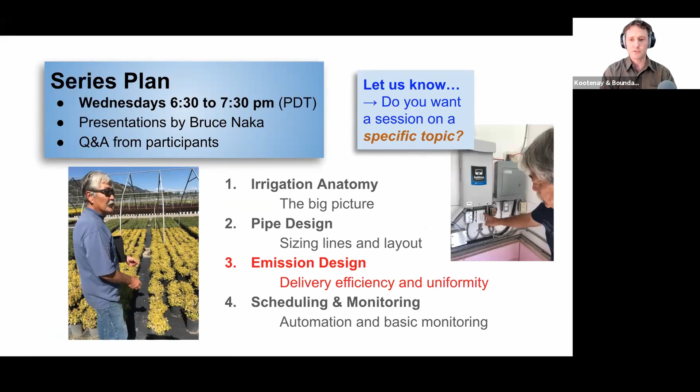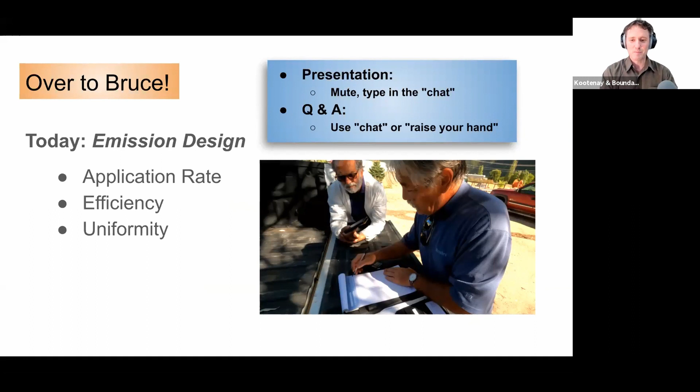What we're going to be looking at is application rate, how quickly you want to put water on your soil, depending on a number of factors, the efficiency of different systems, and then really crucially, how uniform you can get that water across your land, depending on the application. It's complicated as usual, but Bruce will do what we can to bring it down to earth for us. Thanks very much, Bruce. Good evening, everyone.

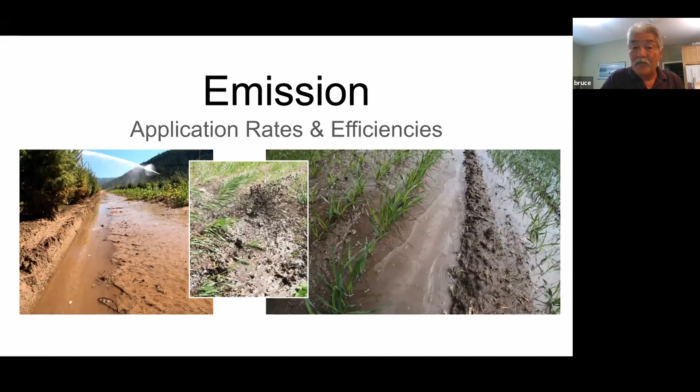So today we're talking about emissions. In today's presentation, we want to focus on specifics of how to apply water efficiently and factors which impact our ability to be efficient.

Some of the issues which have an impact on our ability to be efficient in our watering obviously is waste from runoff. Runoff is always an issue. If you're applying water at too heavy a rate, obviously you're going to have runoff. This session, we're going to be looking at what the right rate would be. Leaching means it's going to leach out of our root zone, so it's not effectively being utilized by our plants, so again it's a loss. In scheduling, some people are probably trying to make sure they have enough water, but a lot of times they're putting on so much water that the soil can't accept it, and it leaches away. Leaching causes issues with both of these problems we've discussed here.

I'm going to look at a little bit of a review here. The emission devices we are looking at include everything from drip irrigation type emitters to spray irrigation, and then more efficient types of sprinklers being utilized versus the brass impacts right now. In pivot systems, we're looking at the drop-down pivots, and then of course we have the big guns. So how do you select these things? Well, you're going to look at the crop height, the water demand for the crop, and the soils and terrain, and that's going to help you in your selection process of what type of device you want.

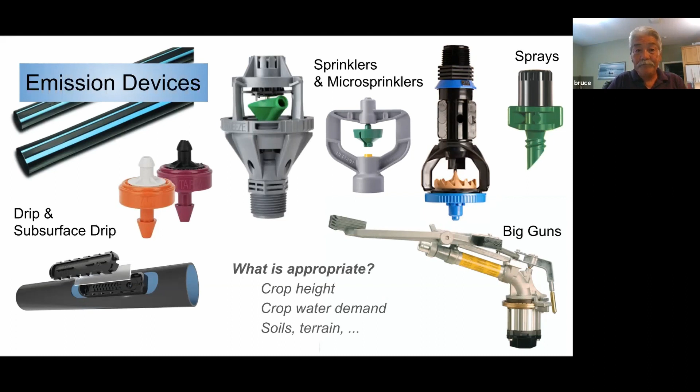Application rates. Keep in mind that with various types of irrigation, you're going to be applying water at a very significantly different rate. With a drip irrigation system, you're applying water at very slow rates, anywhere from 0.1 up to 0.2 of an inch per hour. On the flip side, you're looking at the big traveling guns where you have from 0.5 to 1 inch of water applied per hour. In between, you have your pivots, your wheel moves, and your micro sprinklers. Micro sprinklers are micro in the fact that they're applying water a lot slower than your average sprinklers. Your average sprinklers are in the 0.3 range. Micro sprinklers can go right down to 0.15, but up to 0.4 — that's a little bit of a misnomer. Most micro sprinkler systems I utilize are in the 0.1 to 0.17 range in most applications.

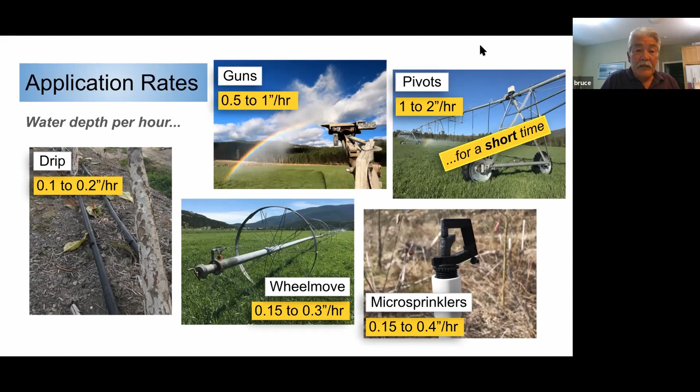Other things that impact our application rates: we want to look at the soil texture. How fast can your soil accept that water? You want to look at the cover, the slope the land is on, and the potential runoff and erosion.

So just a look, if you have a sandy soil, as the chart on the right would show you, if you have a grass crop on it, you can accept up to 0.75 of an inch per hour. With bare soil, 0.4 of an inch. And then down at the other end of the table with a clay soil, you cannot exceed 0.25 inch per hour, and with bare land it's going to be 0.1.

So this is going to be your checkpoint when you determine your application rate. Let's look at a sandy loam type of soil. Because the water flows through it easier, you have the liberty on grass to use an application rate of 0.45 inch per hour. Bare land would be 0.25. So in the case of sandy loam, if you were looking at some heavy water application device such as a traveling gun, in the sandy soil you could probably use that a lot of the time.

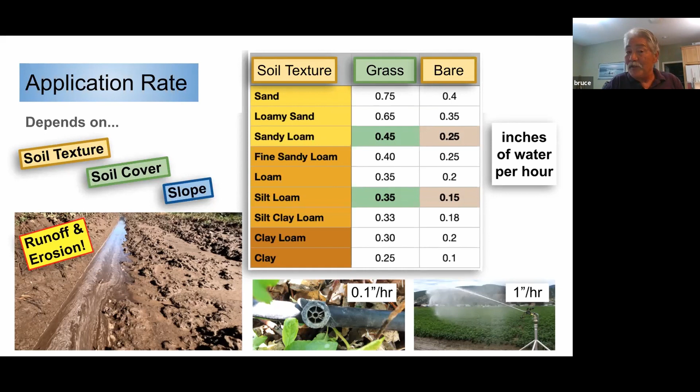But if you had a clay soil, you'd have to look seriously at how you're going to do that. You'd have to really speed that gun up to get your application rate down.

Slope has a very critical effect on our application rates. So if you have a flat piece of land, here we're looking at the sandy loam type of soil again, you're going to be at 0.45 inches per hour as the maximum application rate you could use.

Now let's throw a 10% slope in there. With a 10% slope into that factor, you're going to be looking at 0.34 of an inch per hour as your maximum application rate. Then when you increase it more to a 20% slope, you're all the way down to 0.23 inches.

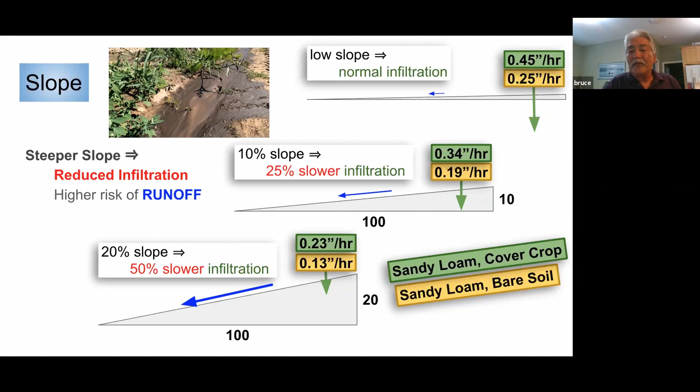So with sloped areas, you really want to look at that. You want to possibly look at the direction you're running your lateral in, if it's a new piece of land, is that the right direction, or how could you minimize it? Could you have a header line in the middle so maybe all of the slope wouldn't be in one section? You'd have to really evaluate the best way to do that.

So just to review again, application efficiencies, if the system is being run correctly - and that's a caveat - this is the percent of the water that's reaching the roots. In subsurface drip irrigation, it's the highest percentage at 95%, versus above ground drip which is at 92%. Why the difference? Obviously, with subsurface you're not going to have the evapotranspiration rate you would have above, and the water will more efficiently move through your soils below.

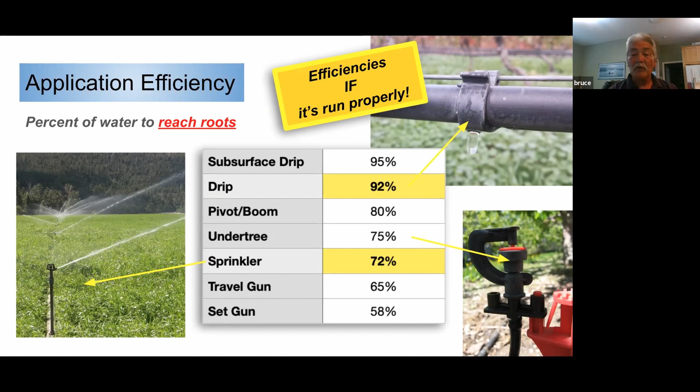Pivots are probably the most efficient other than drip irrigation. Pivot with a boom, the drop down pivots, they are up to 80% efficient. Boom, for those who haven't heard of it, is a conversion device some people are utilizing onto traveling gun sprinklers - taking the traveling gun sprinkler off and mimicking that with like a mini pivot that would go in lieu of that.

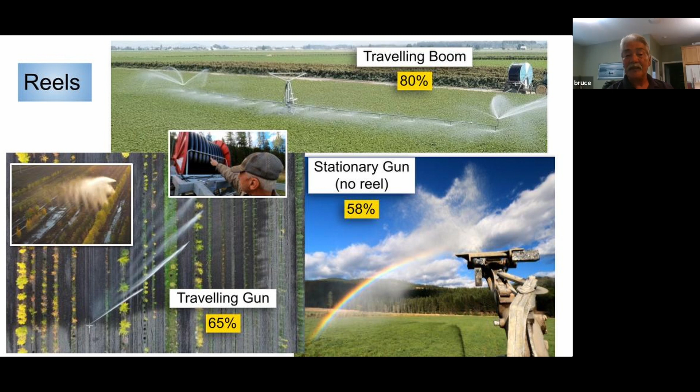Stationary gun, that's the sprinkler head that isn't traveling, is the most inefficient at 58%, and traveling guns are at 65%.

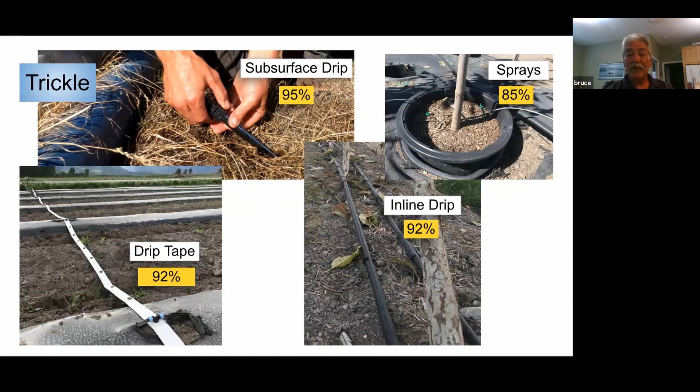Under tree sprinklers are 75% efficient, and sprinklers used just on a hand move system would be 72%. Pivots with low pressure drop, as we were suggesting, are at 80%.

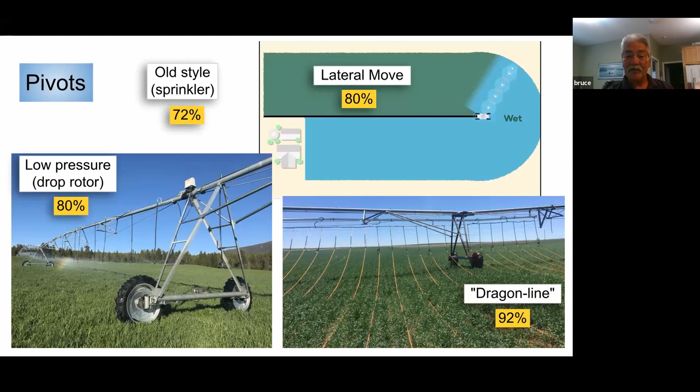Dragonline, which we've discussed before, is a conversion utilized in the South, down in the States, whereby if you have an old pivot system that had maybe brass impact sprinklers off of it, you can convert that to a drip irrigation system and drag that pivot around. So it's energy saving, as well as something that could be more efficient, and on certain crops it's very viable.

It's very important to note that everything we're assuming with the efficiencies is based on an ideal world. The ideal world meaning that the nozzles on the system are uniform in sizing along the line as much as possible, and the nozzles should be new.

If they're worn, if you were to try to size out some of your nozzles, you'd find that after a couple of years, depending on your water quality, a nozzle that started at 1/4 inch could dramatically be 30% higher than that. So your efficiency along that line is significantly different.

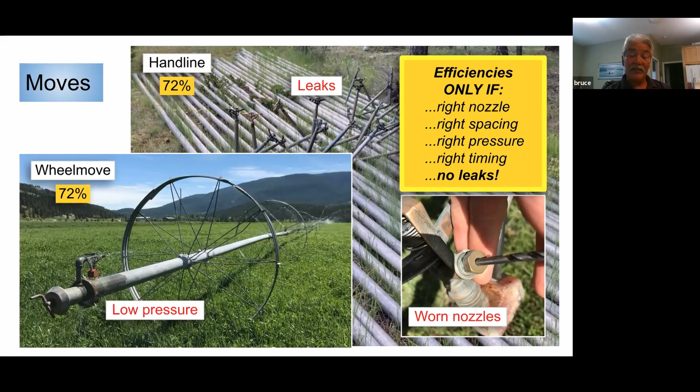The pressure you operate on - they create charts to show you where you'll get the maximum distances from your sprinkler heads, and it's important to base your spacing on that. You don't want any leaks, so you often see large leaks on lines, and that obviously affects your efficiency as well.

Emission calculations - here's something I want to point out. When we're calculating the amount of water you're applying with sprinkler heads, we're looking at an application rate in inches per hour based over an area. So depending on the spacing and the nozzle and sprinkler you're utilizing, you'd calculate that out with a formula, giving you an application rate over a given area.

In this case, we're looking at sprinkler heads covering a 1,600 square foot area, applying water at the rate of 0.18 inches per hour. So it's broadcasting it over an area.

Drip, on the other hand, and this is perhaps one reason why drip is so efficient, addresses the amount of water we're utilizing for a given plant or tree. We ask how much water does that specific plant need. We have crop coefficients, factors based on their ability to cope with evapotranspiration rates, which can be more forgiving. For example, grapes require a lot less percentage of ET than say a cherry tree.

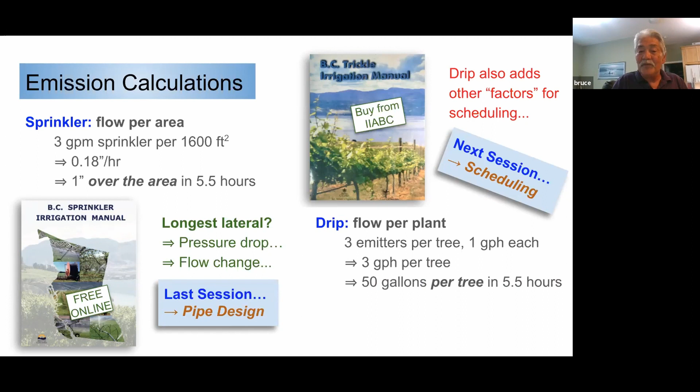I should have mentioned on the last slide - our next session is going to be on scheduling. In that session, we'll go over for your drip irrigation how much water you need for a specific plant, how that formula comes out, and if you're interested we can go into a lot more detail. That's getting down to the nuts and bolts of what we need to know - the tool for how much water we need to apply.

Uniformity - guns, sprinklers, and micro sprinklers.

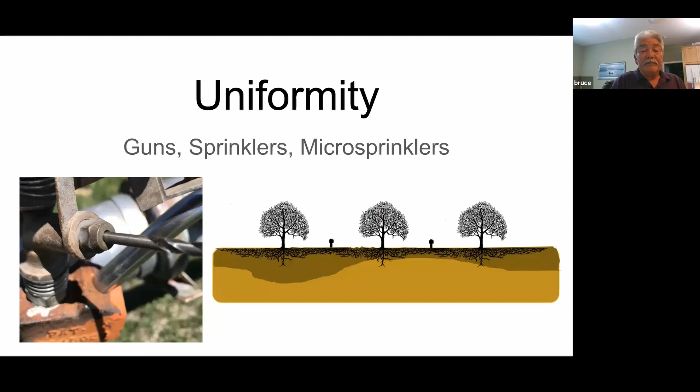So what's going to affect the uniformity of your sprinklers? In other words, if we do everything just right - no friction losses along our pipeline, a relatively flat field - how can we still go wrong?

Pressure has a big impact on the distribution of water coming out of it. For example, if you run too high a pressure, those sprinklers are going to mist - throwing out a very small droplet of water that atomizes and minimizes the throw of that sprinkler. So it's very inefficient in a lot of applications.

A lot of people think the higher the pressure, the farther that sprinkler is going to go. But that sprinkler may go a long way, yet it could just be a tiny droplet of water flying like crazy and not efficient, because it depends on where that droplet hits the ground and whether it's being distributed evenly. Well, that doesn't happen with high pressure.

Medium pressure - if you were to look at a performance curve on any sprinkler head, I always try to look at the middle of the chart.

You'll find, it'll vary, a half-inch impact sprinkler or a micro sprinkler operating at 20 to 35 pounds pressure. 30 pounds is what I usually use as the optimum mid-range pressure. When you go up to a bigger sprinkler, 3/4 inch impact or larger, you want a minimum of 40 psi. At that pressure, your droplet of water is going to be a medium size, which is best for distributing your water.

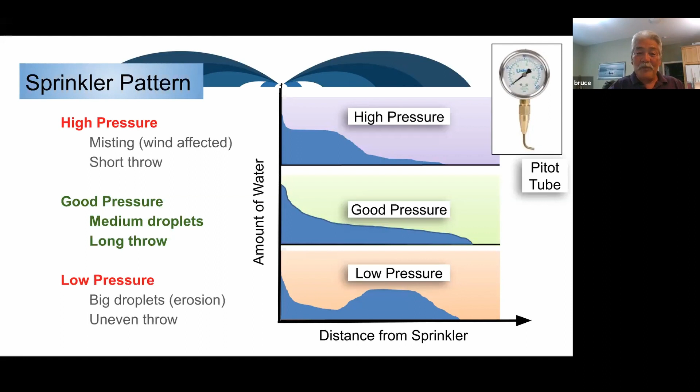Okay, what are some of the tools that we can utilize? If we're in a situation where we have too high a pressure along a given line, one of the devices you could utilize is pressure control underneath the sprinkler heads. Depending on the length of the line, if you wanted to get elaborate on some systems, they have pressure regulation.

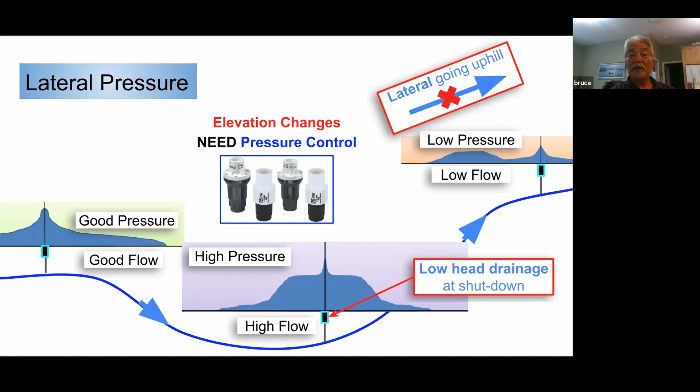We do a lot of times in drip irrigation right at the beginning of each zone. But depending on the length of a lateral and a lot of other things, you may need to have individual head control. Undulations in ground terrain are going to affect our pressure, and also affect drainage after the system's off. So that's something else that's going to impact how evenly our water is being distributed along a given line.

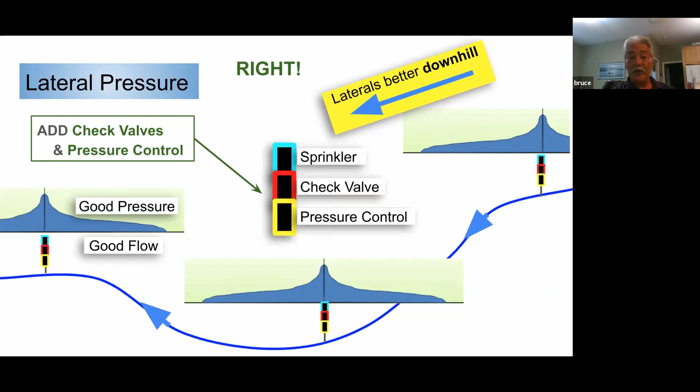For the next slide, please. Okay, I'm bad, it's not the next slide, but we'll get to it.

Excuse me. Spacing of your sprinklers obviously is very important too. Obviously, the spacing has got to be consistent along a row. So if you have decided on a 40-foot spacing on your sprinkler heads, then you want to make sure you're consistently at the 40-foot along that line.

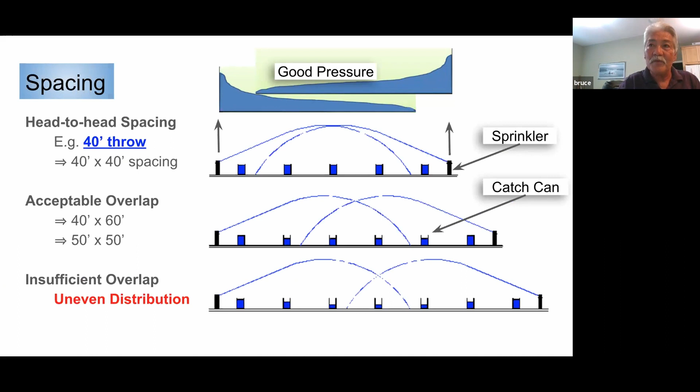If you have typically head-to-head spacing - I'm sure that's a term the majority of you have already heard about - head-to-head spacing means where the spray of one sprinkler head comes up to is where your next head should be. So from one head to the next, the water is hitting from the opposite one into it.

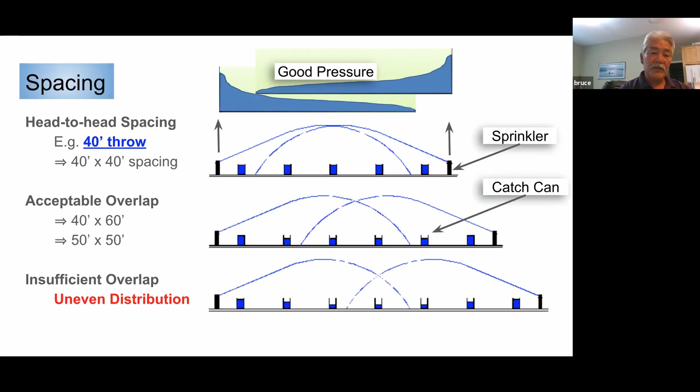Acceptable overlap in agriculture that we were utilizing for sprinklers typically is 60% of the diameter of the sprinkler, based on a zero wind condition. In other words, if you had a 40-foot radius on that sprinkler head, you have an 80-foot diameter. The 80-foot diameter, 60% of that would be 48 feet. So with a sprinkler that's got an 80-foot diameter, you would not exceed 48 feet on your spacing.

One thing that's important is when laying your sprinklers out on a given field, be cognizant of the wind. There's always going to be wind in some circumstances, but if it typically comes from a given direction and can be fairly strong at specific times of year when irrigating, you may want a stronger spacing in those areas, since the wind will blow the spray further. Say we're looking at an average spacing of 50 feet - if you had a 60 by 40 spacing with a 3/4 inch impact, you'd probably want to go to 60 feet, adjusting for wind strength, and stay tighter at 40 feet in the other direction. You always have to be cognizant of wind when looking at your overlap situation.

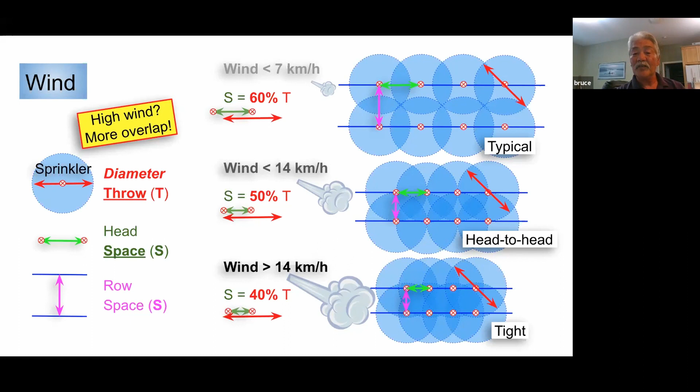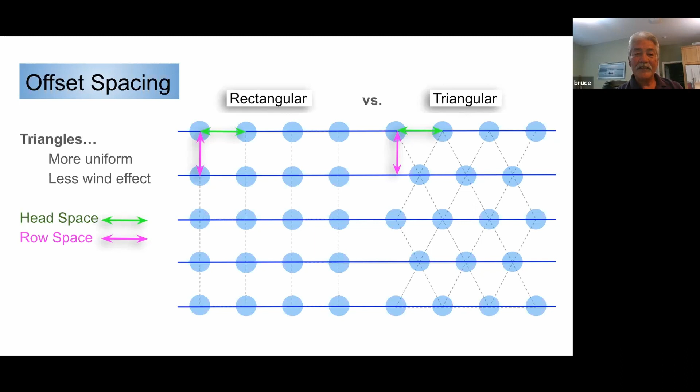Okay, some other tricks of the trade. I'm not going to talk too much about rectangular, but triangular spacing is a more effective method than a square pattern. That's because triangular means an equilateral triangle, so the distance between two heads on a line, measured from the point halfway between them to the sprinkler head on the next line over, equals that same spacing distance. So if you were at a 50 by 50 spacing, the distance to the next line in that triangular fashion is also 50 feet. That's the important part.

Traveling guns, other than stationary guns, are the most inefficient of all the sprinkler types, for a couple of reasons. They're often run at higher pressure because it's a large gun, even though they deliver higher volumes of water, and that affects nozzle size. The other thing - and I honestly can't give you the correct answer for this - is that for some reason we're always stretching our spacing on traveling guns.

Typically, even the agricultural manual shows spacing at 65% of wetted diameter. So in utilizing traveling guns, depending on gun size, you'll see lane spacing up to 200 feet, where if we were looking at a sprinkler head with a 300-foot diameter, you'd expect closer to 180 feet at 60%. So they are stretched a bit - I don't know if it's because it fits in easier with aluminum pipe lengths - but that's one of the reasons traveling guns are not as efficient.

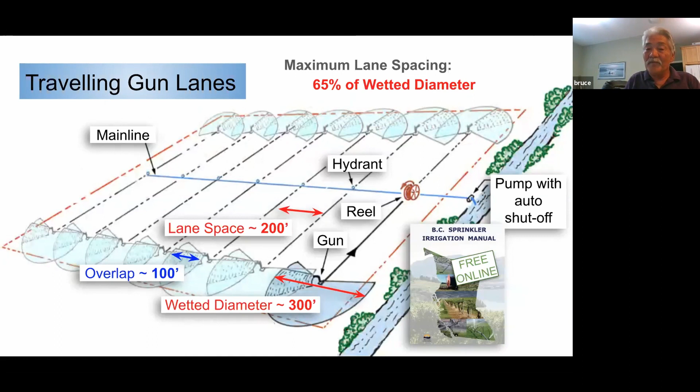Another issue with traveling guns is that when they reach the end of the run, they stop and spray on one spot. If you don't have an automatic shutoff on your pump, they'll keep running in that last position and put a lot of water at the end, which people complain is a waste of water - and it is. If you shut it off, you'll save that water and save on your electrical bill.

This isn't always taken into consideration, but one should be cognizant of it. We see it a lot in vineyards, where many are putting in two irrigation systems - one for drip irrigation, and an overhead system used for maintenance of a cover crop, sometimes for cooling. You always think you want heat in grapes, but not always. So you're looking at areas where you put a part circle sprinkler on the end of a row where you only need it one way, and full circle on the rest.

Match precipitation is something we always use in turf irrigation, but it's very key in agricultural irrigation too. If you have a zone with a whole series of full circle sprinklers plus part circles on the end, or a row of sprinklers on the very outside of a field where you don't want to irrigate beyond it - say along a fence line - and they're on the same circuit as full circle sprinklers, you should reduce the nozzle size in the part circle heads to equalize the application rate with the full circle. So in this example, if you had a 5/32 nozzle giving a flow of 5 gallons per minute, that's what your full circle would be using.

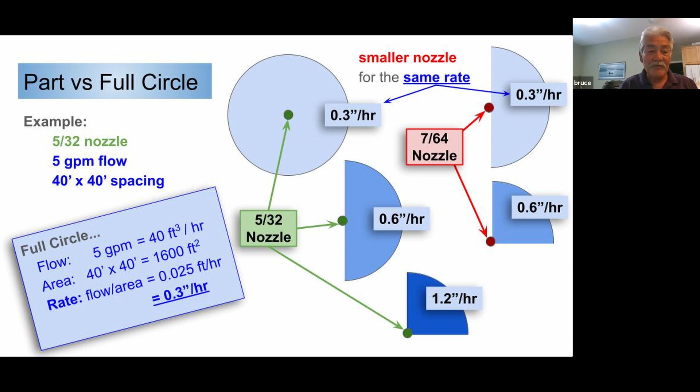Okay, now here's some things you got to look at when you're choosing the right nozzle. What do you want to consider? You want to consider what rate can I apply it at? What's my soil? Do I have a clay soil? If I have a clay soil, I don't want to be applying water too heavily based on the spacing I need. What spacing am I going to need? If it's a row crop, you may be confined to posts in a row, or the spacing between your rows, because you want to be along a row. You don't want to be in the middle unless you're using a pop-up sprinkler head. What pressure do you have available? And what flow do you have available?

So typically someone such as myself or Andrew, who would do an irrigation design, we're going to try and design it with the best tool for the market, the best emission device that we could utilize. So if I'm looking at a circumstance, let's say we're working on a nursery or something like that, and we have a row every 8 feet.

So we want to hit it with some sprinkler heads. You want to come up with something that's a factor of the 8 feet, so that we're in that row. Let's say on every 5th row, we would have it at 40 feet, would be our spacing on that. If it was every 4th row, you would be at 32 feet.

So we want to look at it. We want to look at our client, for our client's sake, we want to have the best product for the job without going overboard utilizing one sprinkler. For example, if we were doing that nursery and we decided to go to 32 feet, we're going to be having that many extra rows of sprinkler heads, where the 40 feet will work properly.

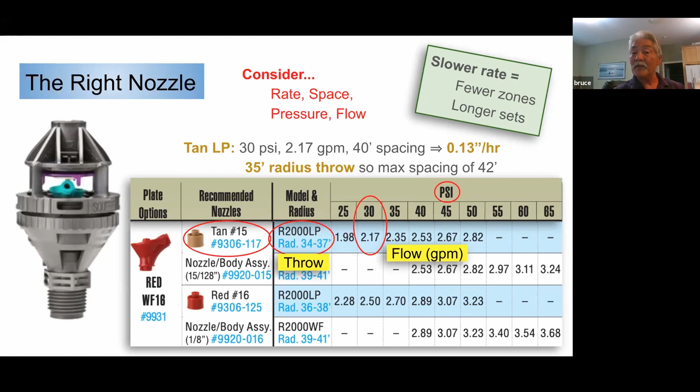Micro sprinkler. There's a place that starts to get confusing when you're looking at micro sprinklers - is this drip or is this micro, is it a sprinkler? The answer is, when you're calculating out your flows, a micro sprinkler is a movable sprinkler that's throwing water around, emulating closer to a sprinkler head than a spray or drip would. So we utilize the micro sprinkler booklet to determine how to calculate the application rate.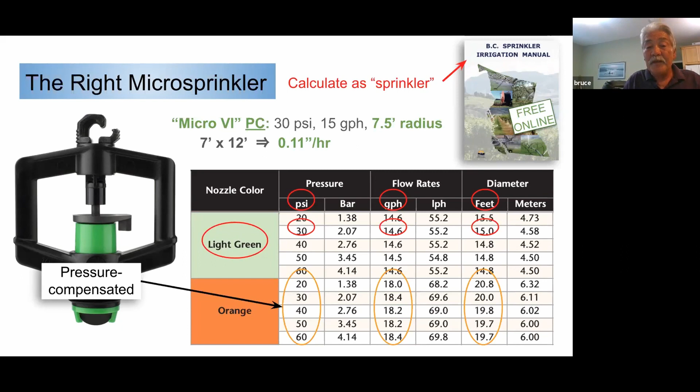So for those two reasons alone, I would caution against it. But the other reason - anytime you're looking at any micro type of equipment, be it a micro sprinkler, a micro spray, or drip irrigation, keep in mind the smaller the flow rate, the smaller the orifice size, the more critical the filtration necessity is. I always look at that depending on the area you're in. If you have very turbid water, you want to look seriously at it, and if you're going to go to micro sprinklers, be prepared to be more elaborate in your filtration requirement.

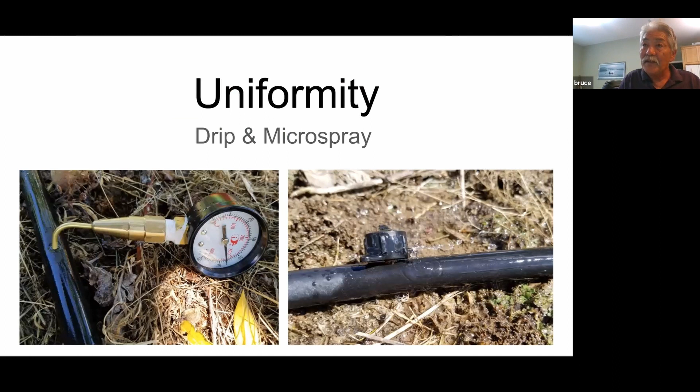Uniformity with drip and micro sprays. We're going to look at how efficiently micro sprays and drip are going to be. We're dealing with lower pressures, so it's not as forgiving necessarily as sprinklers will be. We want to look at the patterns. What happens when you're using drip equipment is that water is being applied to a given area. What happens to that water when it enters the ground? Depending on your soil, it has quite a significant difference.

I will say one thing: if you utilize a sand soil, the art of how you might want to get more spread is you may go to a higher application rate of an emitter in order to facilitate that. You could hit a point where that water gets more spread out because you're applying the water at a higher rate than if you're going with a lower one that's just going to go straight down into the ground. Next, please.

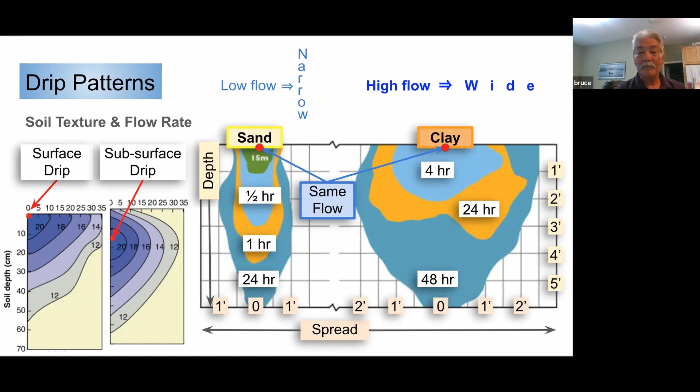So drip patterns. What are we trying to do in drip irrigation?

Well, one of the things I know from earlier years with drip, when people were starting to consider utilizing drip irrigation for crops that previously didn't have it, for example apples in the Okanagan and Creston areas, you had old trees at wide spacing, looking at 20 by 20 or 25 by 25 with interplanting in these orchards. So they were typically being irrigated by sprinklers. Sprinklers were affecting the whole root area, and the roots were big and established.

Then along comes drip irrigation. With drip irrigation, you found that on average, maybe 3 to 4 years in, an effective drip irrigation system could work, but if it's stressed, there was a lull in production when they switched to drip irrigation.

But drip irrigation wasn't done the same way as it is today. Drip irrigation meant that if you had a tree, you put an emitter on either side of the tree, and it effectively watered the roots. But the roots were spread a lot further in a lot of those older trees, so they weren't getting the entire root zone.

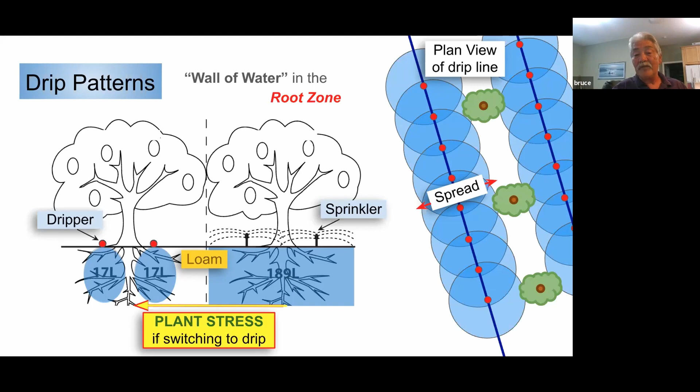One of the things we've gone to more as years progressed is the fact that we try to create a wall of water along the line. So regardless of the spacing, based on the type of soil we have, we want to create a wall of water so we can effectively address the whole root zone. We're not going to get into the middle of the panel, but we'll effectively hit the root zones of those trees along those areas, and we can minimize some of the stress. Next, please.

One tactic that's been utilized a lot with drip irrigation, we've talked about this a lot, is that if you have a single row of drip irrigation in a system and you're not satisfied with the results, in a lot of circumstances -- we've done this in cherries, we've done this in blueberries -- you'll go to 2 rows, one on either opposite side of the trees. On a brand new tree, they may start out with 1 row, and then as the tree matures, they'll add the 2nd row of drip on the other side.

The transition to that is far less expensive, and it doesn't cause a lot of differences in your zone sizing when you calculate it out, because your 2 drip rows are probably going to use less water in a lot of instances than going to 1 row of a micro sprayer or micro sprinkler, where you need larger piping, more zones, and everything like that. So your costs as well as your infrastructure changes are often better when utilizing drip irrigation for that circumstance.

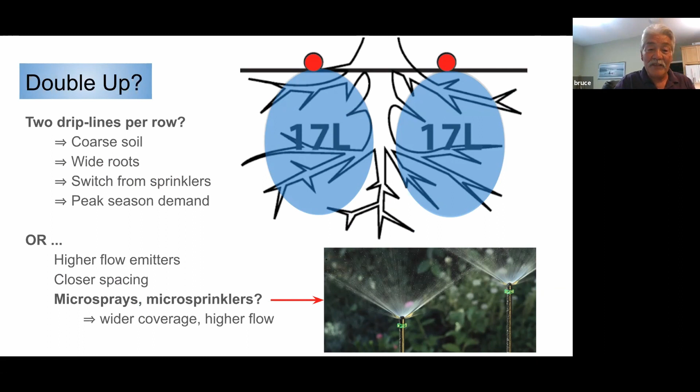We've even had circumstances with drip irrigation where, if someone wanted to maintain a cover crop, depending on what you're growing, they added another row of drip irrigation down the center of the panel to try and facilitate that. We've had mixed results on that.

Okay, lateral pressure. Drip irrigation, as we said before, is running at -- we were looking at 30 PSI under tree-type sprinklers, and pressures of 40 PSI on 3/4 inch and larger sprinklers. Drip irrigation, we're running from 10 to 30 PSI in general.

But when you're running at that low of pressure, the impact of losing too much pressure is obviously going to make quite a difference. So depending on what you're doing, if you're operating at 20 PSI, and if we were operating like a sprinkler system and allow up to a 20% loss or so on the line, that 20 PSI would be down to 15 PSI. Well, if it's not pressure compensating -- and this leads into something I'm talking about -- the amount of water coming out of one emitter versus the next, between 20 pounds, 30 pounds, and 15 pounds of pressure, is going to cause significant differences.

So if you had one plant getting, for example, 2 gallons an hour of water, and the one down the line was using 2.5 to 3 gallons of water, that's quite a bit of difference in water. So you're not going to have a lot of uniformity there.

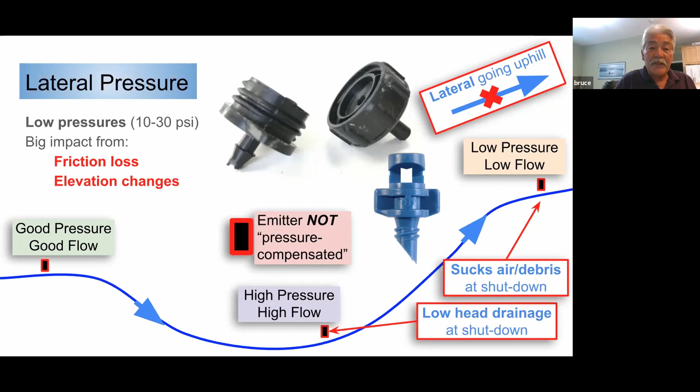High pressures, high flow, good pressures, good flow. Elevation changes make a big difference. Rule of thumb: anytime you're using drip irrigation, even if it is pressure compensating, you always want to feed from the high side. You're not going to feed uphill utilizing drip irrigation.

So for lateral pressure, the best thing is pressure compensating emitters, be it a punch-in type, a tape, or inline drip. These are the types you can look at, anything that's pressure compensating. You're going to get a lot longer line capability, as well as a consistent flow throughout that line.

Something that's overlooked a lot in drip irrigation is that in low pressure situations, air is drawn into the line. In a lot of circumstances with significant undulations, they'll have an air vent on each zone. I always say in drip irrigation, you want to be a lot more particular about adding air vents along your main line in the area where you have your drip irrigation system. Any significant changes in elevation, you want to put in an air vent.

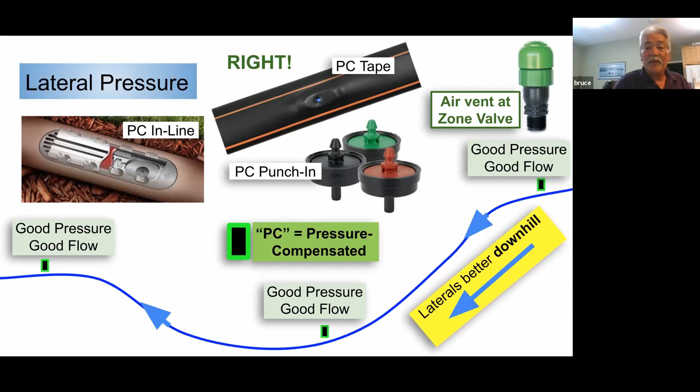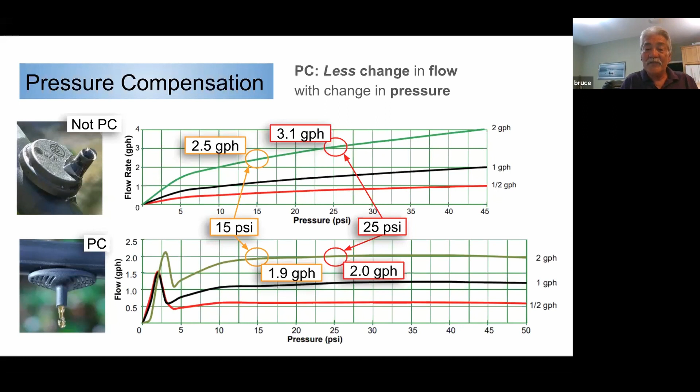Versus with your pressure compensating, you're going to see your curve being very flat. Always keep in mind, whatever device you're utilizing, you want to be cognizant of the orifice size of the emitter. If the smaller emitter uses a tremendously smaller orifice, keep that in mind when you're sizing out your operations.

So this is a classic type of non-pressure compensating emitter. Here it's showing us our orifice size of 0.043 inch. We want to filter up to 10% of that opening size, so 0.0043 is the number you come up with. Looking at charts in your BC Ag Trickle Manual, that tells you that you need a 140 mesh screen or sand filter of equivalent to facilitate that.

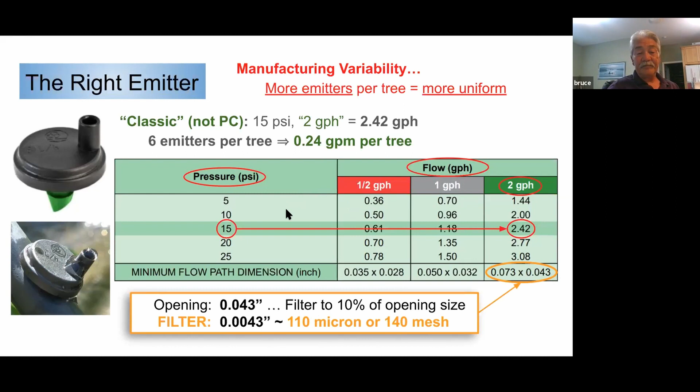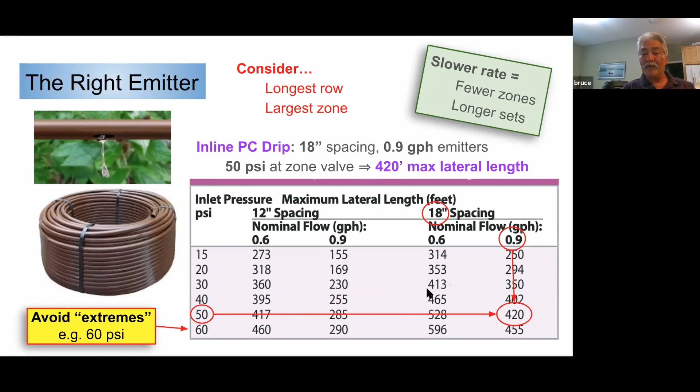So how do you know how uniform your testing is going to be, and how well it's going to work? One point I missed earlier: anytime you buy inline drip irrigation equipment, it usually comes with a chart telling you the maximum distance based on tubing size, whether half-inch, 5/8 inch, or up to 3/4 inch. For very long runs you may want larger tubing, but typically at a 24-inch spacing using about a 0.6 gallon per hour emitter on flat ground, you could go close to 500 feet and still have a very consistent flat curve.

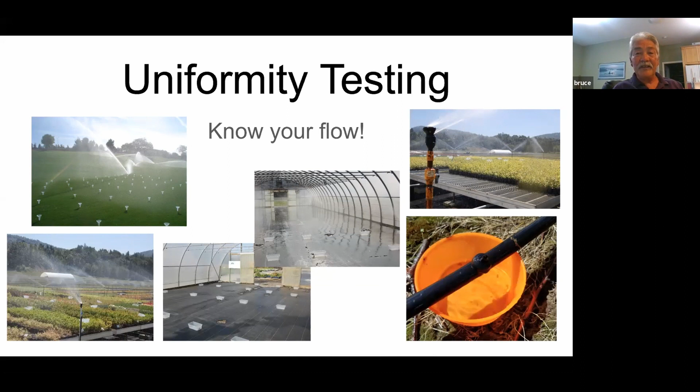But it's a good way to compare the various products out there and see how close they are.

Uniformity testing - you've all heard of catch cans. Catch cans take it to the next level, placed along a line through a sprinkler system to see how even the amount of water is across your given areas. How do you do that?

You need some sort of containers, and whatever container you use, you have to be consistent. They've got to be the same size. The typical one used for catch cans is a narrow cylinder with a big catchment area on top, with graduated marks on the inside so you can precisely determine the amount of water in it.

Using a tuna can or a coffee tin, for example - I've used coffee tins - but how accurate are they going to be at telling you exactly how much water is in there? If you've gone to the trouble of determining that 1 liter of water reaches a certain ring around the tin, sometimes that does work, and you can do it that way, but you want to be accurate in your readings.

You want your cans, whatever you're using, to sit flat on the ground - not on an angle where water would pour out. You just want to make it as consistent and foolproof as possible when setting up your catch cans.

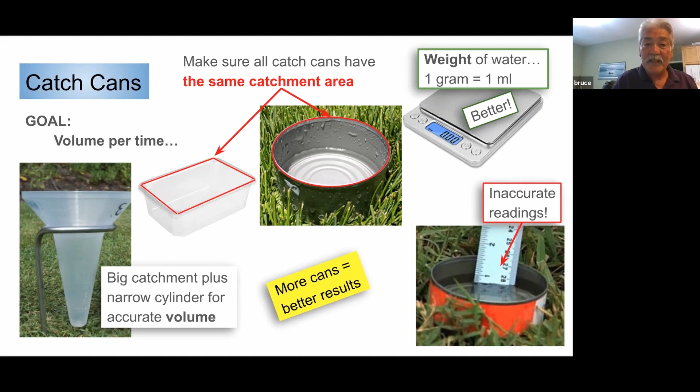More cans, the better the results are going to be. So here's how you do a layout.

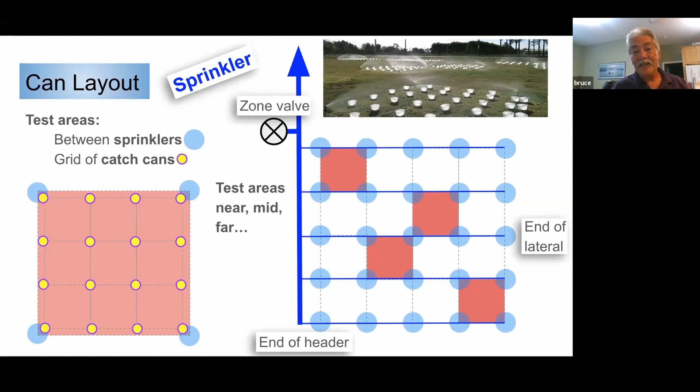You may want 2 different rows of cans for various reasons, since there might be differences there, and obviously you want some at the end of the row as well. If you have elevation changes, address that area so you have at least 4 catch cans in a lower area and at least 4 in a higher area, so you can determine the difference in water amount across the whole area.

Now we're looking at drip irrigation. How do you do a catch can test with a drip irrigation system? One way is to put your tuna tins, graduated discs, or graduated cylinders underneath each emitter in a given row. You could go at random places - one at the beginning, one in the middle, one at the end, or more if you like - and determine over time how much water is in each.

The trough idea is like a rain gutter where you collect all the water flowing down a tape, gathering it at the end to know how much water ran over the entire line. I'd rather see catch cans placed finer along a given line in 2 or 3 different circumstances. Take that, multiply it by the number of emitters to determine the flow of the whole row, but you still get the ability to see how uniform each emitter along that line is - so you know exactly what the contribution from emitters in each part of the line is.

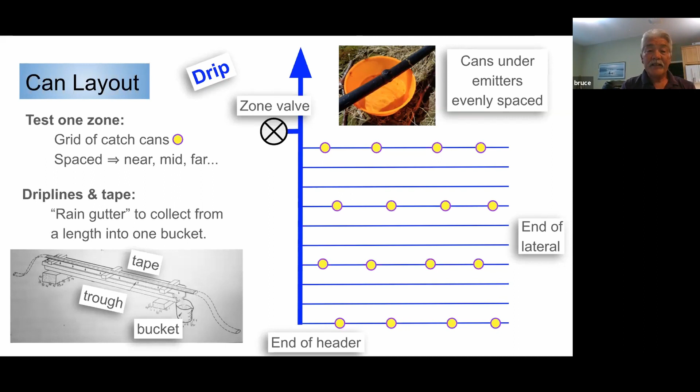Okay, so once we have all this information gathered, the most accurate way that you can compile your results is by utilizing something we call the lowest quarter distribution uniformity. Simply, all you're doing there is taking your lowest quarter, the average of the lowest quarter of the entire project, and then taking the average of the whole area that you're covering.

Then you divide your lowest quarter by your average, and multiply it by 100 to get a percentage. In this case here we came up with a percentage of 81%, which is good, as you can see on your benchmarks. 90% is where we all aspire to be, 90 plus, and 70% is the low end. I've seen catch can results where they were 40 to 50%, so that's how wrong things can go.

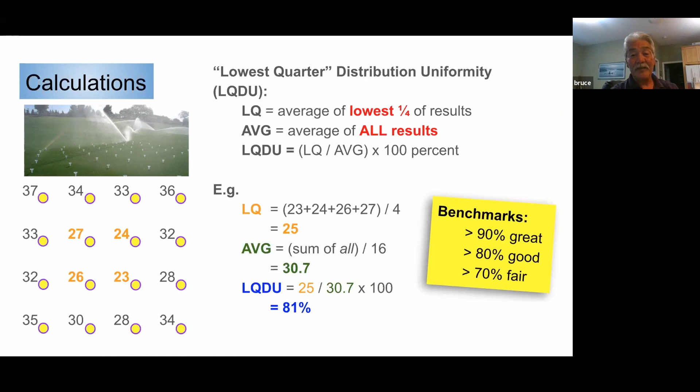As your nozzles wear, as your spacings vary, as wind affects it, there's a lot of different things that we can look at in an irrigation system, without even taking into consideration such things as the soils for a given area. So the workings of that system are very, very important, keeping it as consistent as possible.

Next, please. You made it, Bruce. I made it, thank you very much. A little bit over our time limit. We have a little bit of time for questions. I hope we gave you some useful information. And as Andrew said, if that session we have in the future is just questions and answers, we'd be happy to do that for you. Thank you. That's great, thank you so much, Bruce. Great as always.

I've got a few questions here. Irrigating fruit trees in a clay loam soil versus a sandy soil, what sort of differences are top of mind for you? What are you thinking about when you're designing irrigation for a clay loam versus a sand?

I would be leaning towards lower flow emitters for the clay soil. We would be looking at runtime scheduling, depending on how close to the rate that the soil would accept it. So those would be the key things I'd be looking at. The heavier the soil, the more I'd be lessening the flow of my emitters. And the spacing of the emitters could be stretched a little bit more because we're going to be able to create that wall of water easier.

So the main difference then is trying to make sure that you get enough spread in your sandy soil. Yes, yes. And if you were irrigating with a sprinkler system or a micro sprinkler, you might also be concerned about application rate and puddling with the clay loam. Probably not the micro sprinkler as much, but you would have that. You know, cycle and soak type of applications, where your controllers have the ability to do that. What cycle and soak is, you're taking the total amount of required runtime in a given day, and you might have to break that up into a couple of times if it causes puddling.